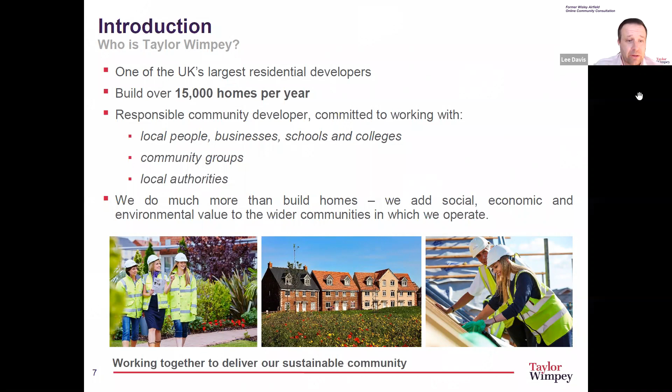Joining me on the former Wisley Airfield project are an experienced and dedicated Taylor Wimpey team, including Antonis, who you heard from earlier, our Community and Green Infrastructure Project Manager, Camille Soor, our Planning Manager, and James Newton, also a Planning Manager, who's not presenting today. I'm also pleased to advise that we've partnered with Vivid Housing Group to deliver 40% of the much needed affordable housing in the area. May I introduce you to John Waterfield from Vivid Homes.

Yes, morning. Thank you, Lee. Yes, we're really excited to be working with Taylor Wimpey on this scheme.

I'd just like to give you a little bit of background to Vivid. Vivid is a medium-sized housing association providing housing for people in housing need. Our vision is to provide more homes and bright futures by helping our customers improve their life chances and their well-being. We're a leading provider of affordable homes and housing related services and support to about 70,000 customers in the south of England. We have about 31,000 homes spanning Hampshire, Surrey, Berkshire, and expanding now into West Sussex. We're planning to build about 17,000 homes over the next 10 years, which is very ambitious, and over 1,200 of these homes over the next year alone. So that's a quick background to Vivid, and I'd like to hand you back now to Antonis.

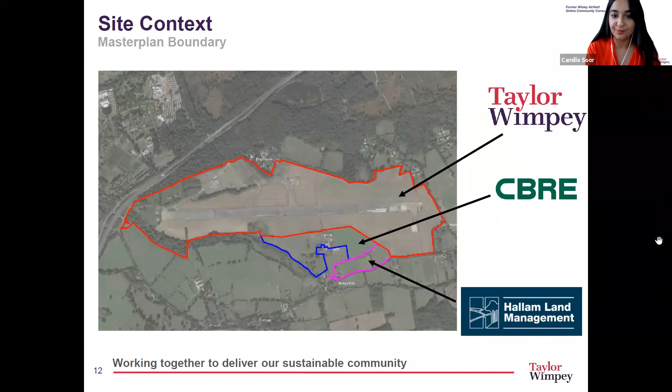This is our vision, working together to deliver our sustainable community. But what does it mean? It means we are working to communicate, engage, and consult with you all in an open and transparent manner. This includes working with our delivery partner Vivid, who you heard from earlier, Guildford Borough Council, Surrey County Council, you as residents, the wider community and stakeholders.

We are pushing to be as truly sustainable as we can from the perspective of climate change, biodiversity, transport, and health and well-being. We want to bring this all together to deliver a new community which is centred around placemaking. It's forward-thinking, has a strong legacy, and is exemplar. By doing so, we aim to provide benefits to and integrate with the existing community surrounding the site.

Setting the planning policy baseline for us is the adopted local plan, as well as the emerging Lovelace neighbourhood plan and supporting supplementary planning guidance, which includes the Strategic Development Framework SPD. As set out in our first public consultation, the adopted local plan sets the principle of development on this site.

Through policy A35, which seeks to deliver approximately 2,000 homes and approximately 100 extra care units on the site, along with a suite of supporting non-residential uses. As set out previously, this will also include a large amount of open green space, which our team will touch on later.

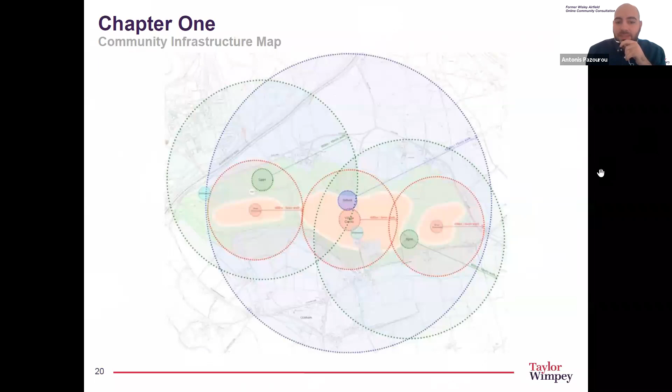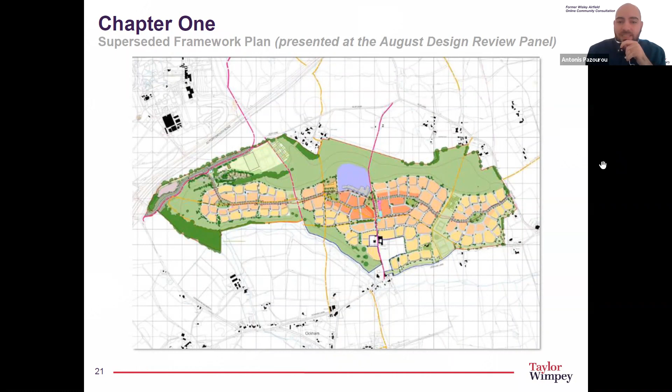In September, we received the meeting minutes from that design review panel, which have been uploaded onto our website in the documents library, so please feel free to review those at your leisure. A few key things we took from that and will be working on moving forward include the concept of a series of villages, defining a richer sense of place, and integrating with the community. Please do review those meeting minutes on our website.

Since July, we have put together a community liaison group consisting of 14 local stakeholder groups. I'm pleased to inform you that we have received further interest and will be allowing further groups to join, where we discuss aspects of the site in more detail. The group typically meets every 2 weeks, and please feel free to go to our website to see the presentations and meeting minutes from those meetings.

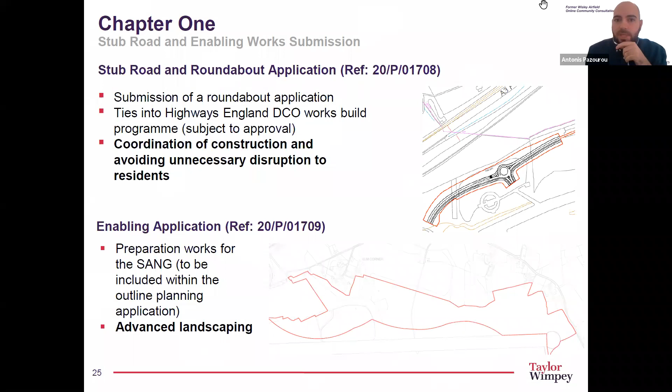Of course. As mentioned earlier, we have now submitted our stub road and enabling works applications. These have both been registered and validated by the local council and are currently being consulted on by all internal and external consultees. We are closely monitoring the applications and any comments received, and working with Guildford Borough Council to aim to have both applications decided in the first quarter of 2021.

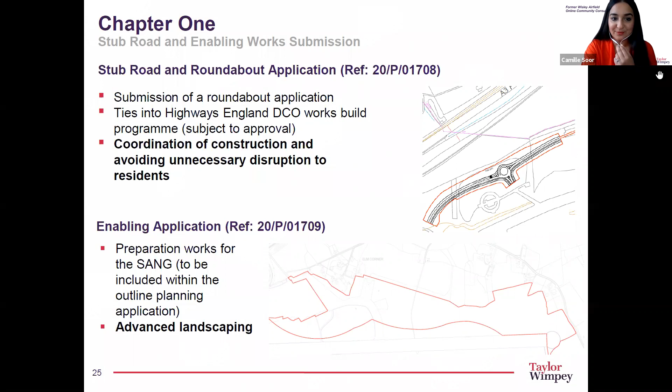Thank you, Camille. So we've had an introduction and an update as to what we've been working on. If I hand over to Graham Kime, our master plan architect, he will run through where we are with the latest master plan.

Good morning, my name is Graham Kime. I'm a director of Gardner Stewart Architects, and we're working with Taylor Wimpey as the master planners for this new settlement. At the last consultation event in July, we discussed strategic ideas relating to this neighbourhood, including how we might break it down into 3 different villages, and the types of facilities we would be providing, asking where you thought the best locations for those facilities would be. There was a high degree of agreement in the feedback, and this diagram shows the preferred locations together on one drawing, including some walk distances that feel comfortable in terms of our aims to encourage walking and cycling. Thank you for your thoughts on that.

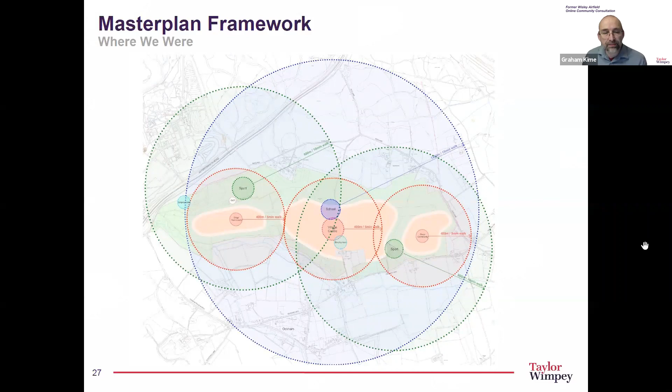This starts to give some shape to our new community. But of course that's not design. A master plan is more than a response to a series of constraints and functions - it also has to create a place where people want to live and that can enrich their lives. So we're focusing on placemaking, on creating communities and on building connections - physical connections, but also social and community connections and visual connections. Our concept proposes a series of green lanes and village greens connected by a sustainable transport corridor.

The new settlement will comprise 3 villages set in an extensive country park known as the SANG, separated by wide swathes of green space, about 80 to 100 metres across. The village greens create a sense of arrival to each village and a focus for community life. Each green is located where connections come together to form a natural focus, where one of the green lanes, the primary north-south pedestrian and cycle routes, meets the sustainable transport corridor that connects the 3 villages.

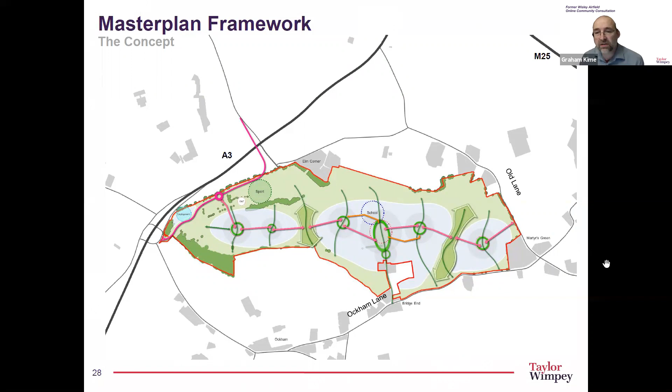At a more detailed level, the master plan is a series of localized design responses, ideas that relate to a particular part of the site or integrate a particular function. So we pose questions and we identify design responses.

How should we respond to the Stratford Brook and the wonderful woodland in that part of the site? Or how can we encourage people to walk or cycle to the shops? This drawing is a cartoon of all of those ideas combined so that they interrelate and work together to reinforce the overall concept.

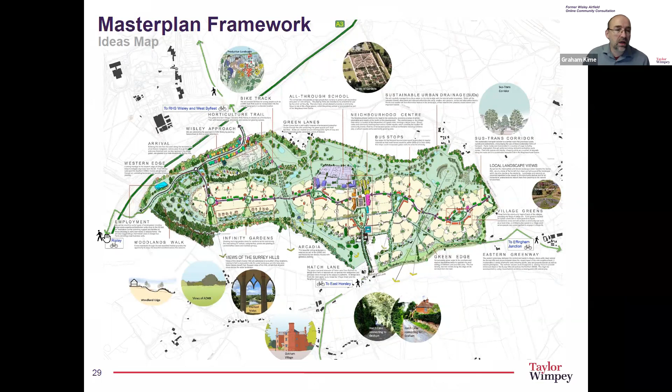So we'll now go on a journey of the site together. Let's assume we're arriving from the Ockham interchange by car, bus or cycle. This is the westernmost village closest to the A3. Number 1 is the proposed Wisley Lane diversion that, subject to final approval, is being built by Highways England as part of the A3 improvements. That road will come off the Ockham interchange roundabout, pass through our site, and go over the A3 to provide a new access to RHS Wisley.

As we come along Wisley Lane, we can glance across the open space through the woodland planting and the new rolling topography towards our development.

Number 2 is about arrival. We propose to access our new settlement from this new road. At this point, there is currently a row of mature trees, which was part of an historic hedgerow that crossed the site before the airfield was built.

Our idea is to follow the line of this old hedgerow to create an arrival sequence. Firstly, we have some ponds and the mature trees that signal the turning, and then a pair of sentinel buildings that form a gateway. Then as you reach the village green, the arrival space, you crown the hill and you're greeted with a view across the Surrey Hills.

This view provides a connection to the wider context. It's part of the experience of the site that we'd like to retain, so we will open up this view in a number of locations.

You may be wondering why we have some multicoloured trees. Well, this road is also an entrance to RHS Wisley, and there's an opportunity to celebrate that. In collaboration with RHS Wisley, perhaps we can create a sense of arrival through the planting of specimen trees like a linear arboretum.

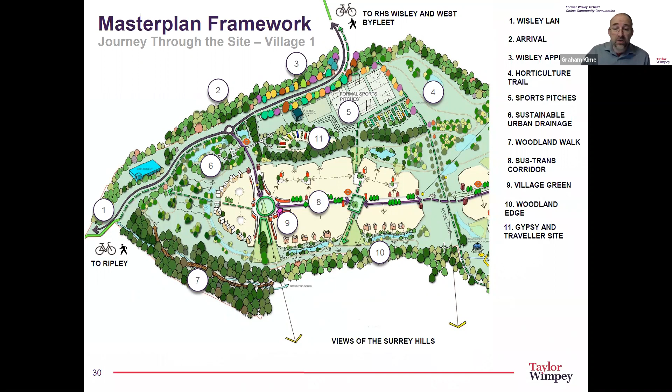Summarising some of those ideas: the woodland walk with the raised boardwalk, the framed views across the Surrey Hills as we arrive into Village 1, and the horticultural trail on the route to RHS Wisley.

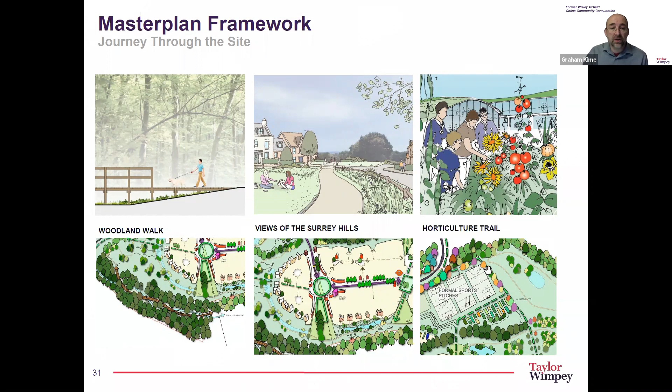Next we look at the central village, which is the largest of the 3 villages, separated from Village 1 by a strategic green corridor shown at number 1. This is about 100 metres wide, so it's a wide swathe of green space that creates a real separation.

This is another of those locations where you get these incredible views over the tops of the trees looking towards the Surrey Hills. Numbers 2 and 3 show the village greens and the green lanes that we described earlier.

Village 2 has 3 village greens, including the larger village park as part of the neighbourhood centre. The village park is located where 5 different public rights of way all converge, so it really is a natural focus point. Perhaps there's an opportunity there for some public art where these things come together.

Many of you who know the site will also recognise this row of poplar trees, which are an existing landscape feature and help to frame some lovely views down towards the Stratford Brook.

Number 4 is the neighbourhood centre, which is the heart of the whole community. We'll discuss this later. This contains a wide range of uses, including shops, cafes, employment and community buildings, arranged around a series of landscape spaces.

Promoting the idea of multi-generational places, we've located the senior living apartments in the neighbourhood centre as well, close to the primary school, where there's an opportunity to engage in village life.

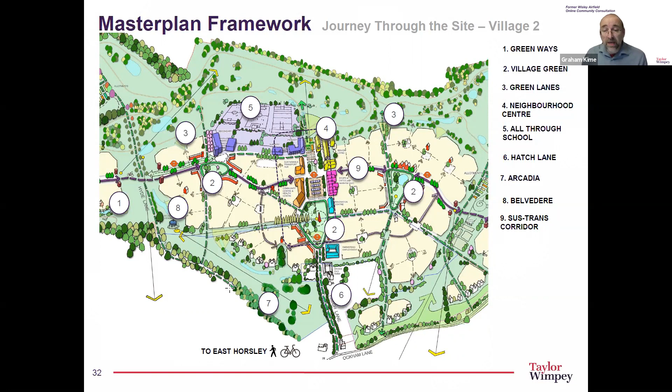So again, here are three of those ideas: the sustainable transport corridor, the neighbourhood centre, with this view of people enjoying some alfresco dining, looking down towards Bridge End Farm and the houses overlooking that village central park.

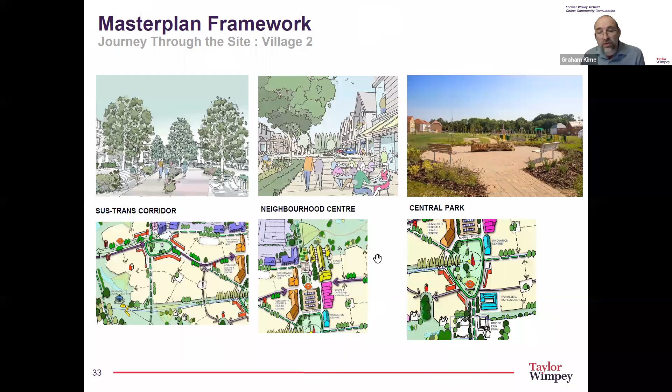Finally, village 3 in the east of the site. Again, a strategic green corridor separates villages 2 and 3, which is at least 80 metres wide, and this is once again aligned with those views across the Surrey Hills.

We're suggesting a viewing mound in the north of this area to take full advantage of those views, and also of the views looking west along the full length of the northern SANG. This idea of ground modelling then comes into the greenway, where there could be a raised play mound that integrates natural play features into the landscape.

Along the southern and eastern edges, we want to preserve the rural character of both Ockham Lane and Old Lane, so we're proposing a setback of about 20 metres of green space. The houses along this edge will be low density and low rise, with opportunities to break up the edge of the development with landscape.

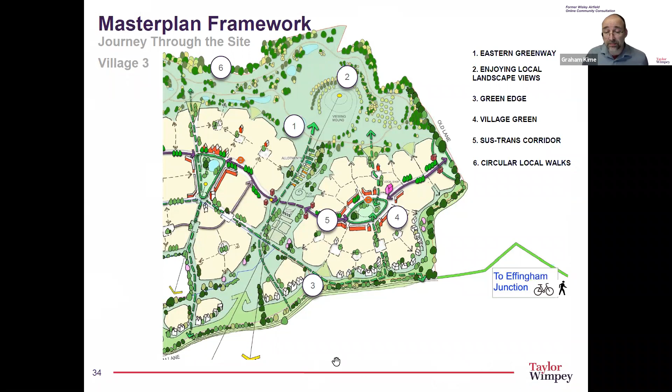So again, some images of these ideas, taking advantage of the views using the topography. This is the Fruit Mount at RHS Wisley, which sets up a view axis towards the glasshouse. The green edge with low density houses set back from Ockham Lane, and of course there's the variety of circular walks that we will be providing within the SANG.

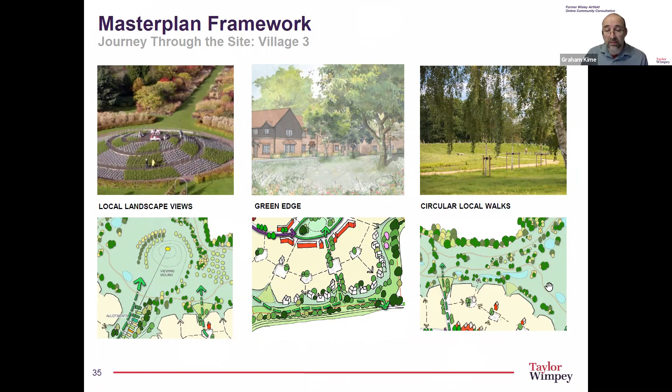Following the various rounds of engagement and consultation so far, the framework's developed and evolved to address different considerations and incorporate new ideas and opportunities. So this is the current framework that we're working on now.

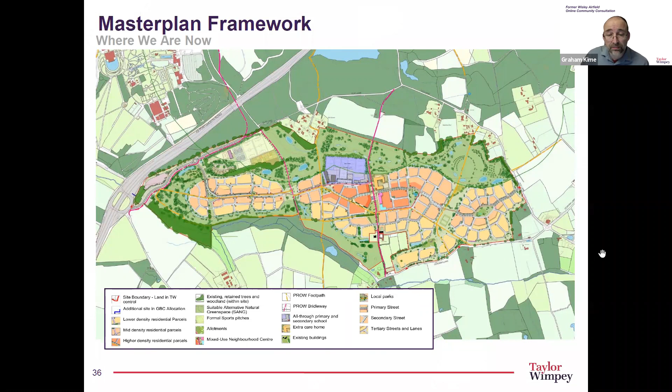You can also see the village areas that are focused around the village greens. As part of our design process, we've studied many of the surrounding villages to understand their forms, their architecture and their spaces. There are a lot of village greens in Surrey, and they come in all shapes and sizes.

As Camille said at the beginning, we're submitting an outline planning application, so we're not designing the buildings in detail at this stage. The homes we're showing here are illustrative. We will be designing the homes and streets later, and they will take their cues from the architectural forms, features, and materials of the local area. But this new settlement needs to create its own sense of identity, so we don't necessarily have to replicate those buildings, and we'd like to hear your views on the architectural approach we should adopt to make this place distinctive.

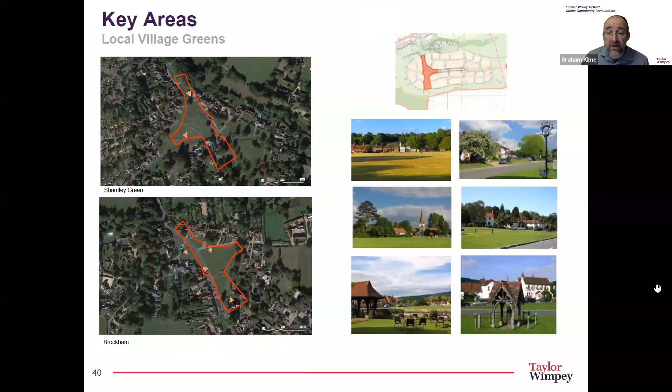So what about the size and scale of our spaces? Here are some comparison slides showing our green spaces in a red outline overlaid on some local village greens that you may know. This is an outline of our Village 1 green overlaid on village greens at Shamley Green and Brockham, and you can see the spaces are comparable. The size of our village park, which is larger, is comparable to Chiddingfold Green, and our Market Square is comparable in width to the linear spaces found in the centre of Cranleigh.

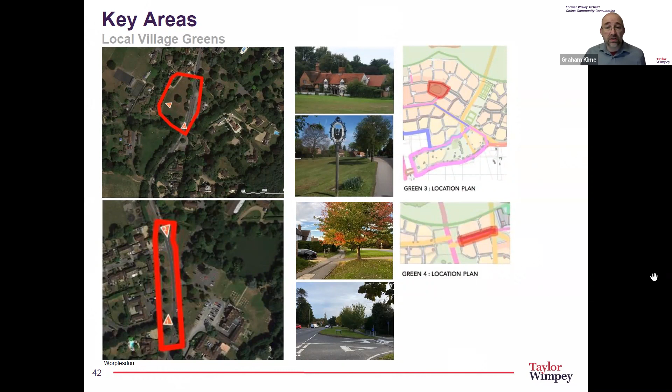Similarly, this green in Worplesdon is similar in size to our green in Village 3, and the linear space that extends from the green in Worplesdon, with its houses set back and wide green verges protecting the pedestrian and cycle route from the edge of the road, is very similar to the approach we're taking to segregate pedestrian and cycle routes on our approach to the schools.

So it brings us back to the question: what do you think we should be providing in our contemporary village greens? Is it the same as these examples, or different? We've put some ideas together, such as children's play, public art, and a local information board. It would be much appreciated if you could suggest your own ideas in the feedback forms.

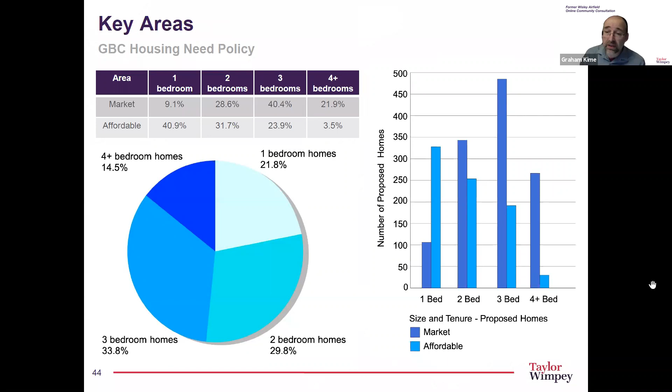So what sort of homes will we be providing here? Across the site, we're master planning for 2,000 homes overall, of which just under 1,800 will be on the Taylor Wimpey part of the site, plus 100 specialist senior living apartments. We'll be providing a range of housing that meets local need as set out in Guildford Borough Council's housing policy, which, as you can see from the pie chart, is mainly 2 and 3 bedroomed homes. 40% of the homes will be affordable tenures, and it's great to have John here from Vivid, who will be able to answer any questions you have on that.

We're required to make efficient use of the land, and the allocation and the SPD suggest we should build at an average of 45 dwellings per hectare. So the density of homes will not be the same as the surrounding settlements. This place will have its own character and generally higher densities.

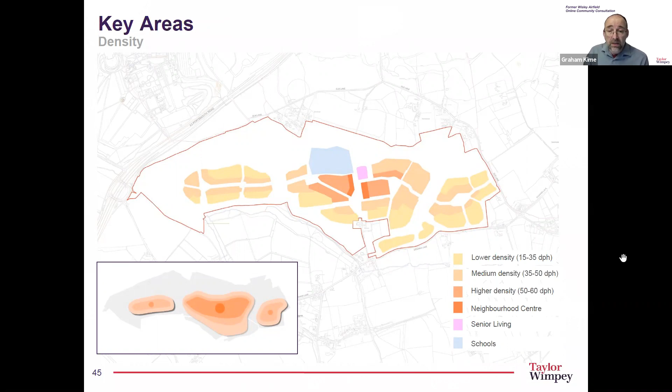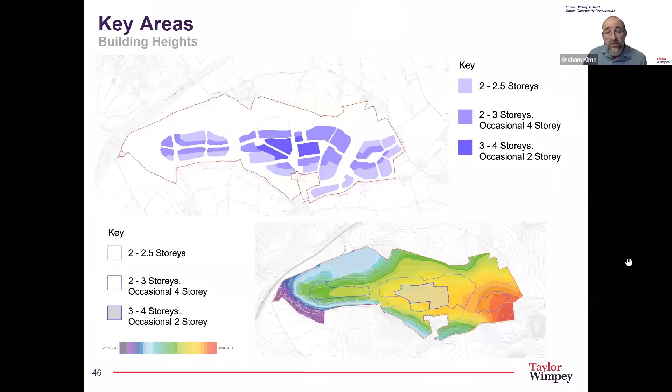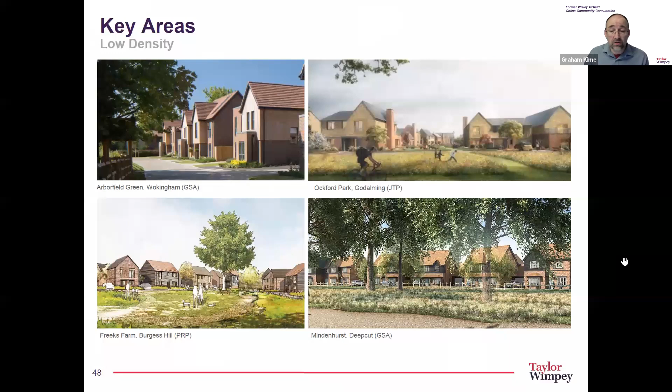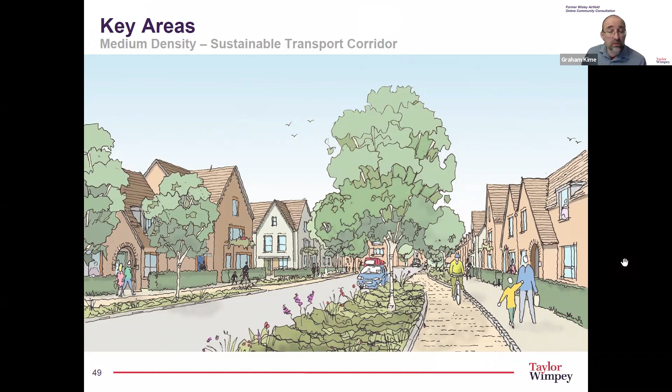Again, this architecture is illustrative, and these local building forms and materials could equally be applied in a more contemporary way, if that was the approach we took.

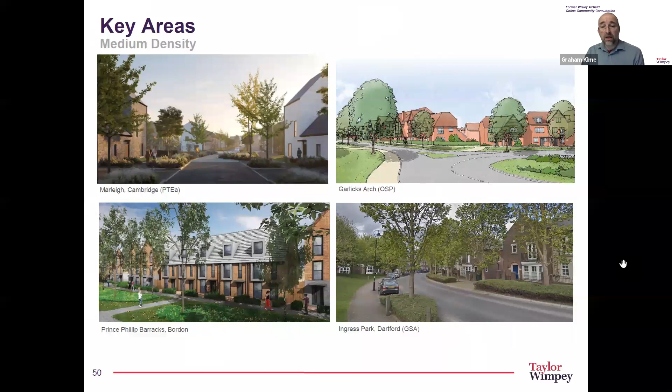Away from the central corridor, the medium density areas will be designed as narrow streets and lanes. They'll be tighter, more pedestrian friendly, with slower traffic speeds and a variety of architectural forms and locally relevant materials such as brick and tile hanging.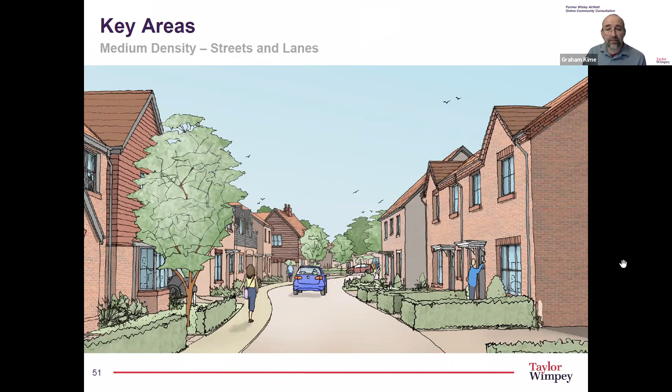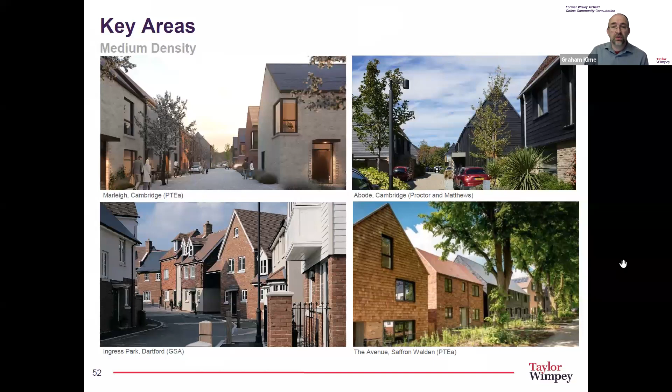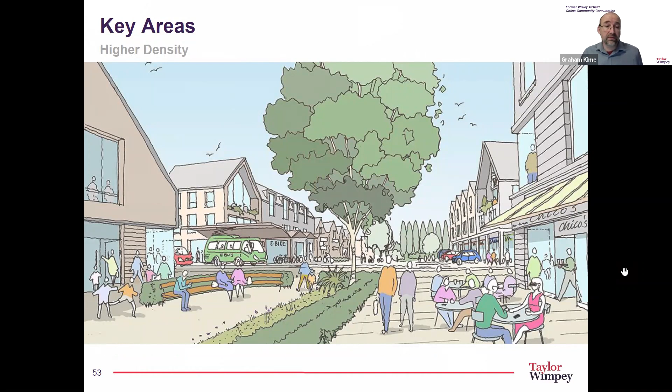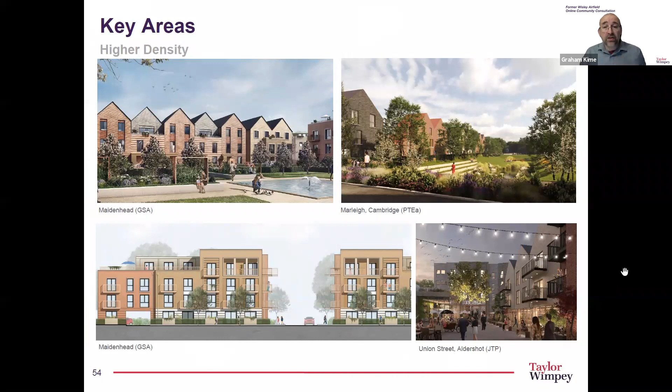I mentioned the sustainable transport corridor that runs through the site, ties together all these different areas and connects all the different facilities. Whilst its character will change as it passes through the different parts of the development, it remains a constant element which helps to provide orientation.

Its purpose is to connect to places and to encourage people to use more sustainable forms of transport by making it as easy as possible to get from one part of the site to another on foot or cycle, via an attractive and safe route.

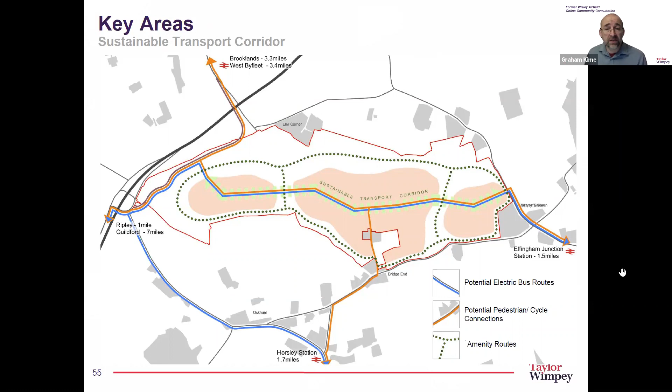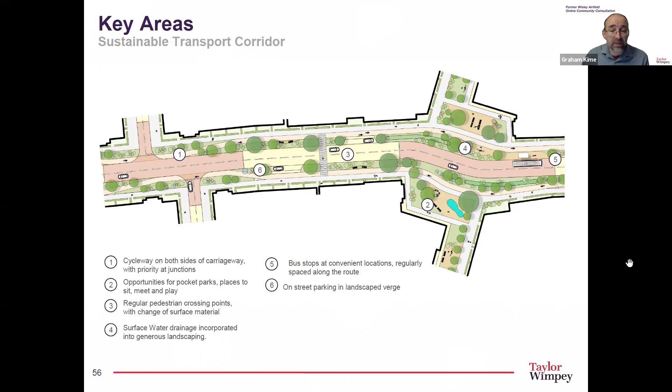And it's not just about movement, it's about turning a road corridor into something more communal and celebrating it. It's about creating a green outlook for more people, introducing little pocket parks and village greens as a point of orientation, somewhere to stop and chat, for the kids to play on their way home from school. And it's a sustainable drainage corridor.

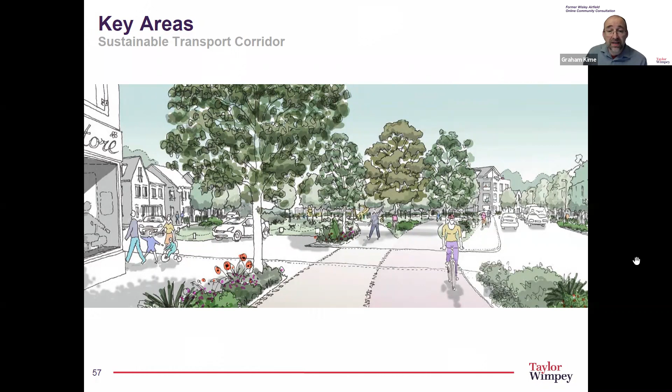So it's something more than a road, it's a piece of green infrastructure, and it's a positive piece of placemaking. All of the green spaces are hugely important in the master plan, both in the way that they create an attractive and pleasant environment, but also the way that they contribute towards a green and healthy neighbourhood, providing opportunities for people to be active and to socialise, which I think we've all recognised has become increasingly important.

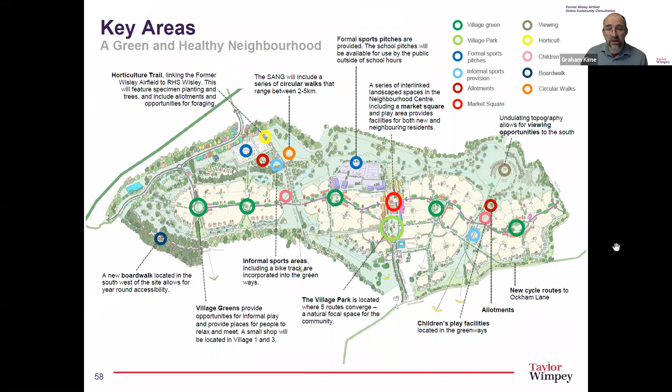The neighbourhood centre then provides a focus for the whole community. It will include shops, including a food store, and cafes. It will have community buildings such as a village hall and a health facility, and also employment uses. It will engage with the schools and with homes. So it's a genuine mix of uses.

And the neighbourhood centre is arranged along the line of Hatch Lane. This is retained as the rural lane in the south, then opens up to reveal a central park where the five pedestrian routes converge. Within the park there'll be a variety of uses: a children's play space, terrace seating for an informal lunch break, and the opportunity for public events that might be organised through the community trust.

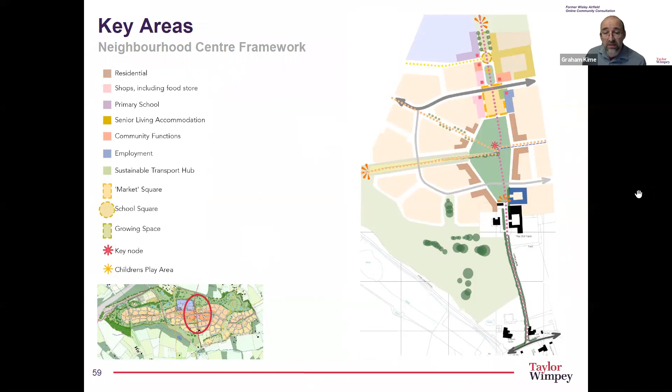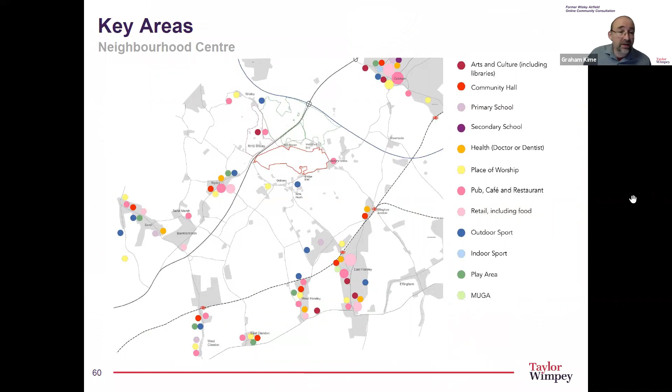We've carried out surveys of facilities in some of the surrounding areas in order to understand the types of services that we might need to provide in our neighbourhood centre. This shows one of the ways that we might organise the buildings and spaces. We're in discussion with a number of potential users and operators, so things may change as we start to pull those different ideas together. But essentially there will be a number of different buildings arranged around a progression of public spaces, and these spaces will offer a variety of characters and places that relate to the buildings around them.

For example, the shops face onto the market square, with the opportunity perhaps for a monthly farmers market. There's a small piazza by the cafe for outdoor eating, or a morning coffee say, and there's a public landscape garden by the community centre. Further north is the school square, where parents can gather to chat at home time.

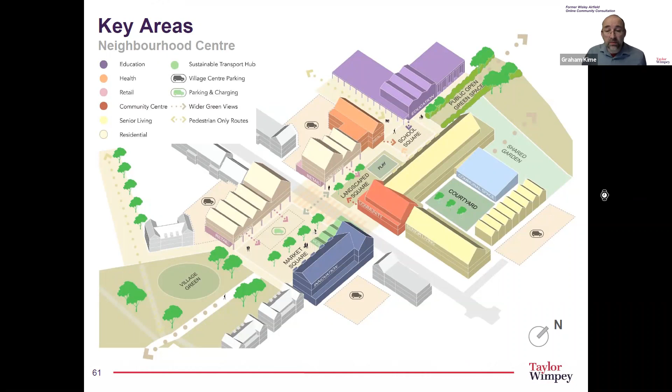In terms of the building uses, we're providing a food store with maybe five to eight smaller shops or cafe units, and all of these would have apartments above. We've mentioned the village hall, the community hall that's run by the community trust, and we're talking to healthcare providers about the health care facility.

There'll also be significant employment uses, and we're looking at how office space requirements may have changed in the post-COVID world. So potentially approaches that provide support to people who work from home or close to home by providing flexible office space and co-working space, like desk hire, meeting rooms, business advice, photocopying services, that type of thing. I think it's generally recognised that there will be more home working in the future, and this type of facility is a very appropriate and exciting idea that will add vitality to the neighbourhood centre and be a real community resource.

Another feature of the neighbourhood centre will be the sustainable transport hub, where you can lease your e-bike or e-scooter. There will be rapid charging points available for electric cars, and potentially an overhead charging point for an electric bus.

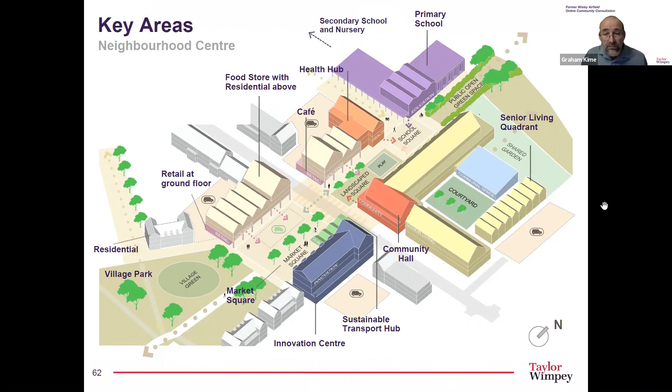We've put together a couple of images of recent neighbourhood centres showing different types of character, and we'd appreciate your views in the feedback forms.

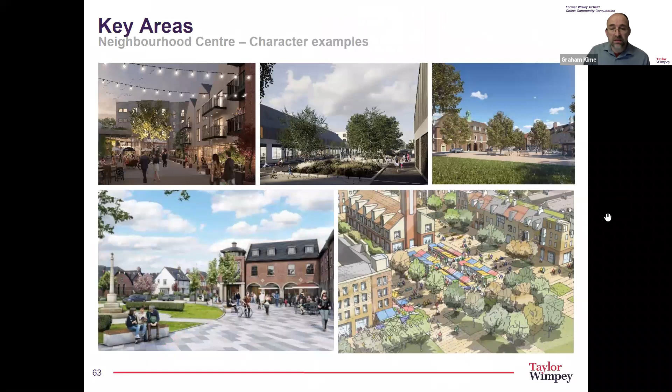So I'll finish my part of the presentation with our view of the neighbourhood centre: a cafe with outdoor seating, the community centre on the left, ahead the sustainable transport hub with its e-bikes and charging facilities, and then a row of shops with apartments above.

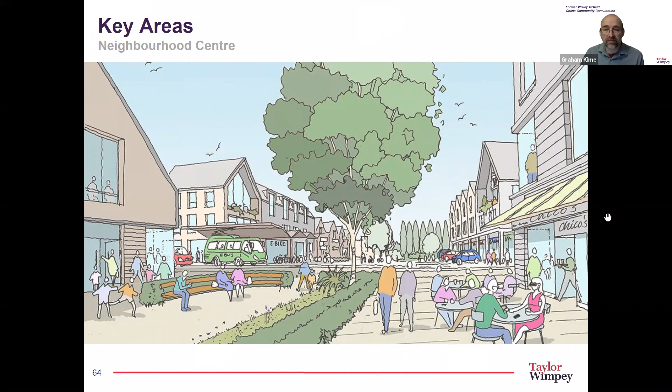Good morning everyone, and apologies if you can see a bit of distortion on the picture due to a graphics card problem with my laptop. My name is Colin Mackay, and for those who didn't attend the previous consultation, I'm the Technical Director leading the work WSP are doing on the transport aspects of the Wisley Airfield proposed development.

However, there were also a number of encouraging points we took away. For example, the majority of respondents agreed with our sustainable transport priority, and a quarter answered that they might agree with that priority but indicated more clarity would be required. There was also good support for e-bikes and for bus services.

So we have listened, and we want to show you how we've progressed since then.

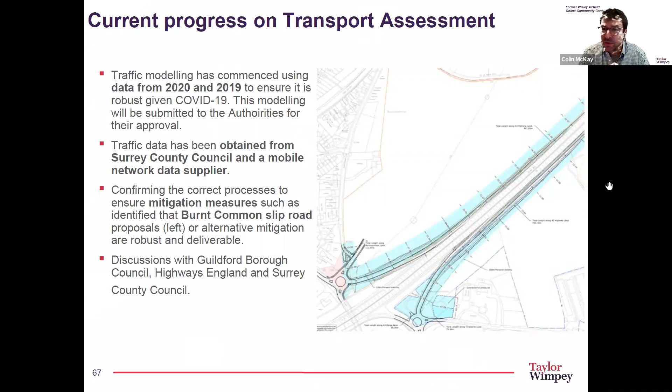So looking at our next steps on transport, engagement on the impacts and the schemes will take place during the rest of this year.

Again, we're conscious of the concerns about traffic raised during the previous consultation in July, and we expect to have feedback on this during the early part of next year once the modelling is complete. We'll also be carrying out ongoing engagement with stakeholders right up to submission of the application next year.

In the meantime, we want to set out how we're seeking to reduce traffic levels through the adoption and promotion of sustainable transport measures.

Sustainability is a mainstay of national and local policy. The adopted Guildford Borough Local Plan, Policy A35, which we set out here, shows what we are expected to address as part of the proposed development. It talks about access points, mitigation measures, and bus and cycle networks required for connectivity.

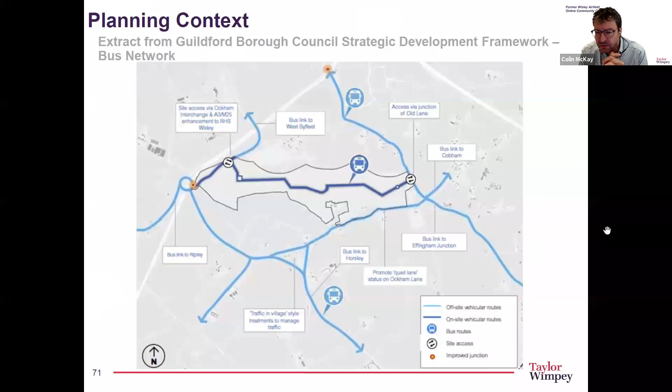These ideas have been further developed by Guildford Borough Council in the council's supplementary planning document, firstly in terms of the vehicular connections to the external destinations shown here. As you can see, this also includes some information on their expectations for bus links, and also what it terms active travel links on foot and bicycle.

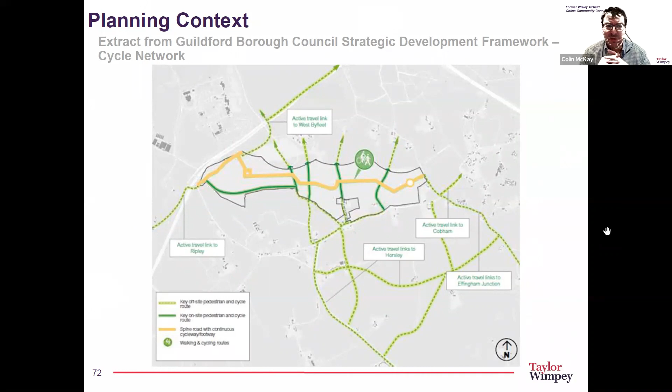These are all options we are actively exploring within the constraints we already know about from our detailed work to date.

The Guildford Borough Council also set out 6 groups of sustainability principles to assist in delivering each of the strategic development sites in the local plan, not just Wisley Airfield. We are following these principles closely in design of the master plan and in our transport strategy generally. As already stated, Taylor Wimpey are taking this development to be an exemplar for sustainability, and clearly transport is a major aspect of that agenda.

Most importantly, we want to influence travel decisions at the front door before the journey takes place. We're all familiar with the business as usual mindset, shown here. That mindset is driven by the lack of opportunities to do things differently.

Behaviour change expert Martin will touch on this later, but if the opportunities are made available, then people are more likely to change their travel habits, given the right encouragement.

By making these opportunities available, we aim to change that mindset to one that sees and makes use of the opportunities. Through thoughtful, intelligent design of the proposed development, people living there will see that the opportunities are all around them, and through publicity and promotion, the benefits will be pointed out to them.

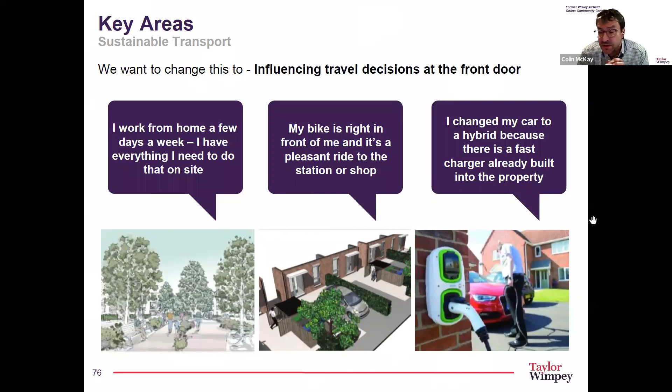Some decisions will also reflect changes in lifestyle some people may experience post-COVID, where they can work from home more frequently. We will be ensuring that adequate broadband connections are provided across the site.

So let's look at buses in a little bit more detail. Looking at the layout of the site, as you can see in the bottom left corner, the site lends itself to bus services very well, meaning a direct route through the site puts most houses within 200 metres of a bus stop and all of them within 400 metres, the recommended walking distance.

The bus stops themselves will provide shelter and could also integrate green roofs or solar panels to maximise their sustainable contribution. Electric buses are becoming more accepted into operators' fleets and they offer cheaper running costs.

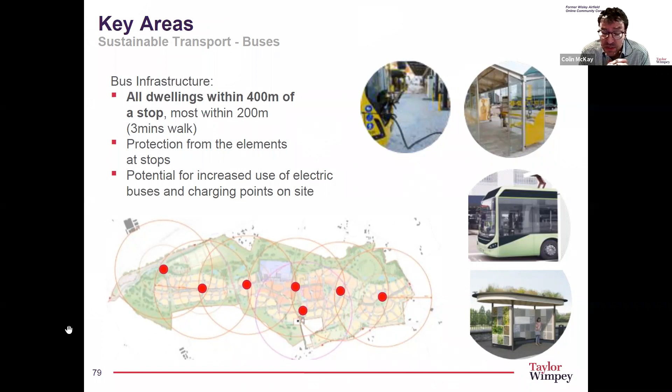Some are being used in Guildford already, as you will know. We will future-proof the site with charging infrastructure, as shown on Graham's sketch earlier, to make electric buses a practical option.

We also want to build on and bolster existing services. Some existing services would be enhanced to improve the frequency within existing communities, improving the offer beyond the site as well as serving the site itself.

You can see this from the sketches here of the intended bus strategy, showing that some infrequent existing services, shown in dotted orange lines, would be enhanced to a more frequent service, as shown on the right.

The priority is to serve the local railway stations, recognising the high proportion of rail travellers from this part of Surrey and the limited capacity of the car parks. So we will provide a high frequency service to match the train departures and arrivals as closely as practically possible.

Woking may also be served with its higher frequency service to London and Hampshire and its retail and employment opportunities. Although we do recognise commuting train services have tended to be much busier and more crowded than the services via Effingham.

Responding to feedback from Public Consultation 1, our service to Cobham will be provided if we possibly can, using one of the fleet of buses, probably not as frequent a service as the others, but it will allow, for example, shopping or personal business trips to this popular destination.

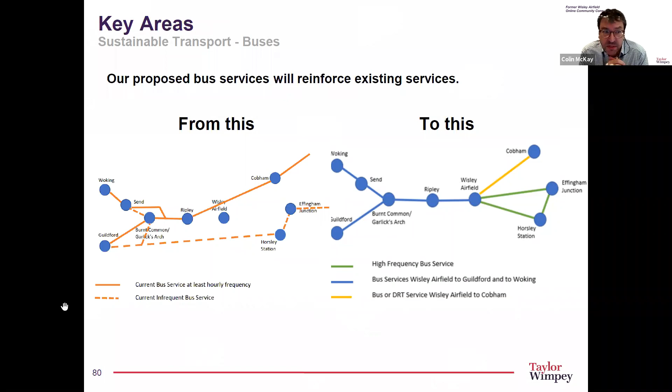As we show here, the number of buses in the fleet will be increased to meet demand as the proposed development progresses. It is very important to have a bus service in the early years, although it will probably comprise smaller vehicles and a more limited number of destinations will be served. However, a 7-day service will still be offered even in the early years.

In the later years, a fleet comprising a mix of vehicle sizes will go to all the identified destinations, and a longer daily service on the key routes will be provided to serve leisure trips and workers arriving late from London, for example. The bus services will be funded through the fares passengers pay, and in the early years, pump priming support will be available from Taylor Wimpey.

So our predicted modal share for the bus service will be projected and validated using a range of other experience throughout the UK on similar developments. However, this will be calibrated to a more local experience.

The Guildford urban area is an important reference, having modal shares of up to 14% in some locations, and typically up to 8% by bus. On this basis, we believe that the bus services we will be proposing can be supported without substantial ongoing subsidy.

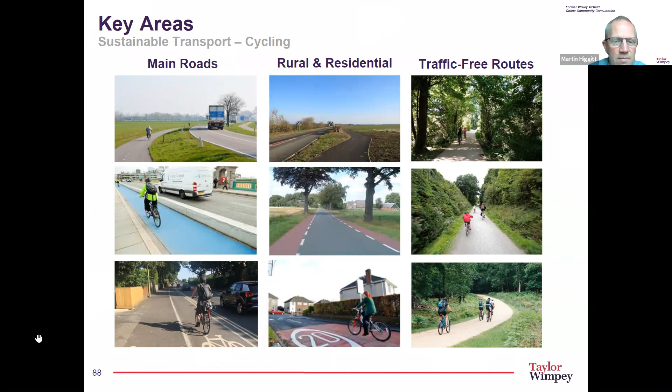Clear signing of cycle routes is important, and lighting, particularly of off-road routes, needs careful consideration. There's an issue of whether to light or not, but where decisions are taken to provide lighting, there are solutions that minimise upward light pollution.

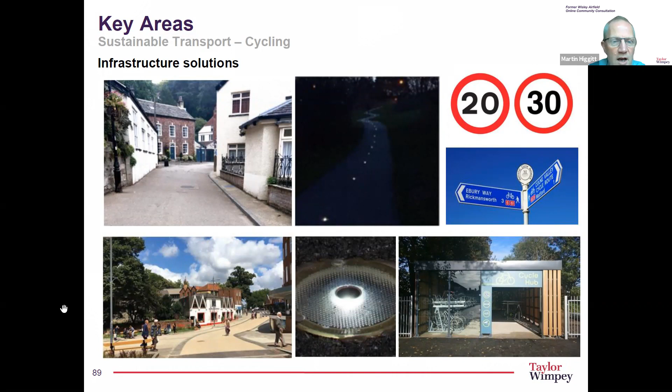Finally, secure, convenient cycle parking at final destinations is crucial. And there are plenty of good examples of high-quality cycle parking at railway stations, for example.

The policy challenge is to provide cycle links suitable for the average cyclist to 4 local destinations: East Horsley, Effingham Junction, Ripley and Byfleet. And we're currently developing our proposals for these links.

All of these destinations are within easy cycling distance, and the bike journeys are easily completed in 10 to 20 minutes and don't take a lot more time than driving. In some cases, such as Byfleet, cycling will be a lot quicker.

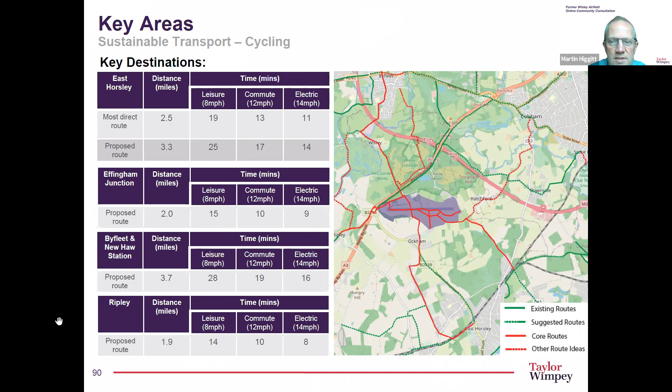So we're considering how the connections we deliver can link into existing routes and future aspirational routes. We hope this shows how our proposals will link strongly with existing and planned infrastructure to substantially increase the network of safe cycle routes in the wider area, making it possible to reach a range of destinations, not just for residents of our new community, but enabling many from surrounding communities to confidently and safely make cycle journeys.

And we'd welcome, again, specific feedback on whether there are any other cycle routes to key destinations that we should be thinking of.

Finally, from me for today, just to say a few words about promotional measures. We would look to undertake a lot of promotional activity through the travel plan to maximise the uptake of sustainable transport services and facilities that we provide. There would be travel plans for the different elements of the development, including the residential, employers and schools.

Possible promotional measures that we're currently working on include the following. Developing a website and travel app to provide up-to-date information to residents and site users on their travel options and providing easy access to some of the services we'll offer. Welcome packs provided to residents showing the facilities available on site and in neighbouring settlements and the travel options available to them.

Sales staff would be trained to advocate the sustainable transport options when people are contemplating moving here. It's really important that we start to influence the way people think about their travel options before they move in.

There would be a programme of ongoing support for sustainable travel, including social walks, social bike rides, bike tryouts, cycle training, adopt a bike, and maintenance classes, as well as car club demos.

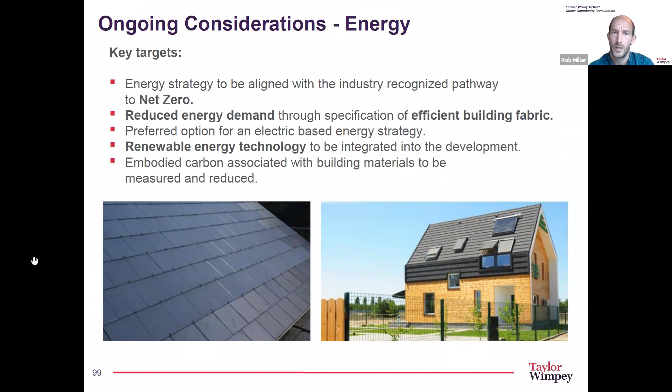So thanks very much, this is all from me on the sustainability strategy at this stage, and I'll now hand over to Sam to discuss the landscape approach for the scheme. Okay, thanks, Rob.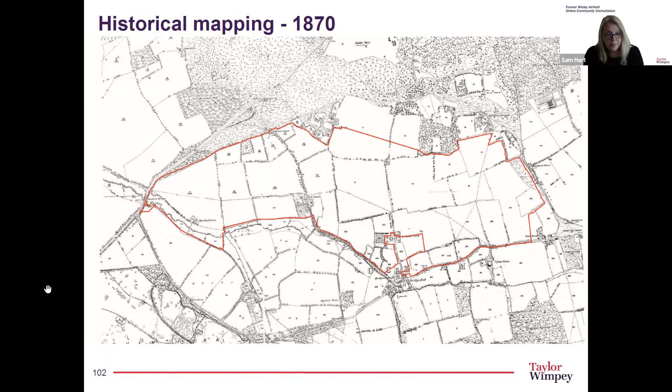As part of the developing vision, we've come up with a series of objectives that are driving the design choices, outlined by Graham earlier.

As shown on the previous map, there are a number of opportunities to restore landscape features such as woodland and hedgerows. Existing features such as trees, hedgerows and the woodland will be protected as part of the design and enhanced to improve their quality and longevity, and be reconnected to the wider landscape.

The reinforcement of the boundaries and connectivity of the landscape within the site will reinstate the smaller scale patterns evident in the wider countryside and provide a more intimate setting for development.

The proposals will provide a significant increase in the quality and quantum of key features such as hedgerows, trees and grasslands, and will extend from the wider setting into the villages.

Green corridors will divide and provide setting for the distinctive villages and include opportunities for formal and informal recreation and social interaction. We will look at the potential types and opportunities on the following slides.

In order to successfully set the development within the landscape, scale, density and height will be carefully considered and tested throughout the design. This will ensure the proposals can be successfully assimilated into the surrounding and existing proposed landscape framework. This is particularly relevant along the southern boundary and the higher parts of the site to the east.

The division of the development into 3 villages by the strategic green corridors will break up the roofscape and massing and views, including limited elevated views from the A3.

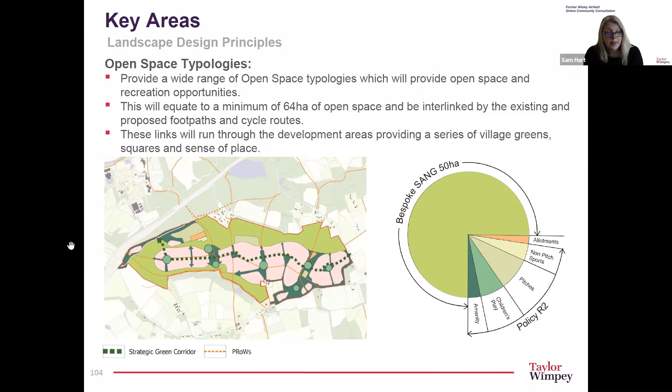The existing landscape features provide opportunities for two differing types of SANG. To the north, the existing arable fields and hardstanding will be transformed into a new wildlife haven with lots of features to draw people in. That will consist of mixed native woodland, copses, grasslands and wildflower meadows interspersed with ponds and linear swales to add interest and further opportunities for wildlife.

New landforms will be introduced to visually break up the openness between the footpath and cycle links and create opportunities for views and vistas towards points of interest and opportunities for natural play. The routes and views will be supplemented with art and sculptures, as well as seating areas and picnic benches. The northern SANG will also include a trim trail and park run routes linking with all the villages.

The southern SANG runs along the Stratford Brook and consists of a wet woodland and steep southern slopes, which provide an alternative range of habitats and visual experiences. These experiences will focus on the existing mature Stratford Brook corridor, and we've included, as Graham described, a boardwalk through the marshy grassland and bluebell areas, and this has been mentioned in previous consultations.

The steeper slopes will be managed for species-rich grasslands and will be interspersed with drainage features to create interesting local points and habitat opportunities. The southern boundary around Bridge End Farm provides opportunities for key views of the North Downs. These will be incorporated into the vistas and routes.

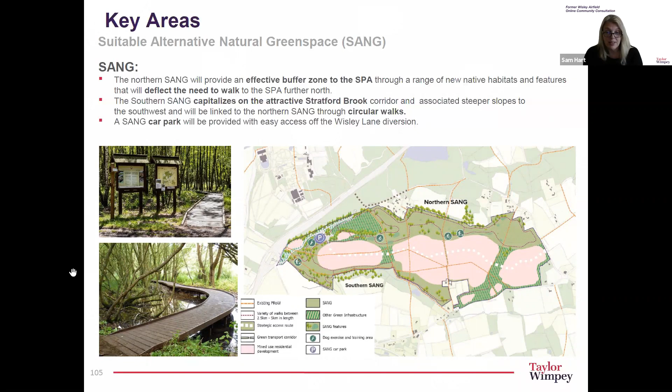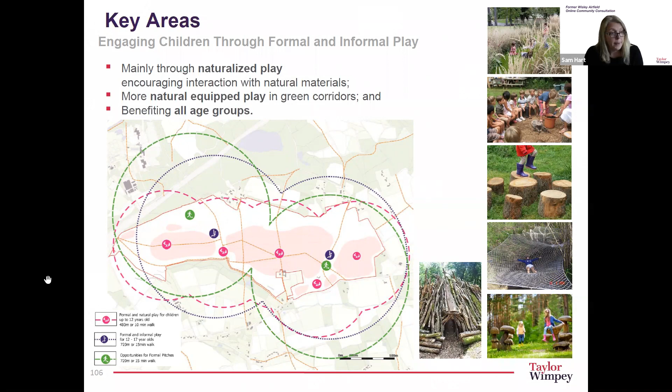Play forms an integral part of children's development and an important element to the building of community. The proposals will afford a wide range of experiences and opportunities in a range of environments for young and older children. These will be set within the recommended walking distances along safe routes and will all have clear natural surveillance.

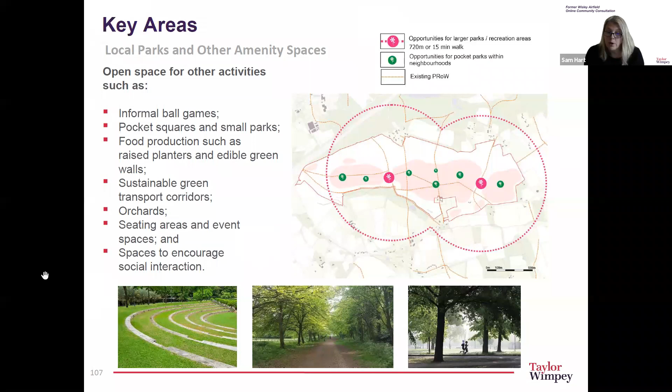The development will provide informal and formal spaces, which will provide a wide range of opportunities for recreation, socialising, interacting with nature, as well as creating attractive settings and identities to each of the villages. We've summarised a selection of potential activities here, but again, we're open to any further suggestions of things you'd like to see included.

It's important to harness the mental and physical welfare benefits that growing food can bring and provide the opportunity for food production on people's doorsteps. We've just set out a couple of bullets here of things we're considering at the moment, and would really love to hear your thoughts on these. These will range in size from the more traditional allotments to other localised community and educational opportunities. The SANG will provide opportunities to incorporate informal food gathering, such as foraging routes.

The ongoing consultations have identified local concerns regarding runoff from the airfield. The drainage strategy is being developed to alleviate this situation and capture all current and future runoff within the site. Flood risk will be managed in a positive way, celebrating water and its value as a precious resource not to be wasted. It will be a highly integrated and holistic system, linking the urban and green infrastructure.

It will provide and enhance biodiversity opportunities, create attractive features such as naturalised and formal ponds, and be interconnected through ditches and swales. It will provide opportunities for rain gardens, biofiltration beds, art, play, and educational opportunities. The water and SUDS will also be used within the site to harvest and irrigate public spaces.

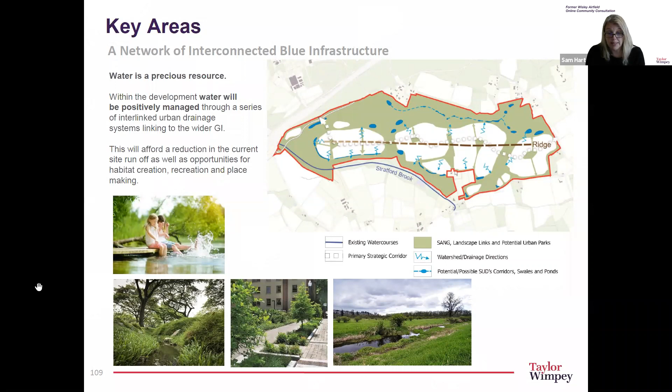My job is to ensure that ecology and wildlife is taken into account in all aspects of the project and is protected as part of the scheme. This includes making sure we have up-to-date survey information regarding the features present on the site, carrying out impact assessments and designing mitigation, feeding back ecological requirements to the master planning and design teams, and providing advice and supervision for ongoing site investigations, as well as during implementation.

We know that local residents have expressed concern about the existing wildlife on site and how it will be protected. I want to reassure you that conserving the existing features of ecological importance on site is our priority too, and we're working very closely with the design team on this.

Some of you may have heard my colleague Jodie talk about existing ecological habitats and species at the site during the last public consultation. This time I'd like to share our thoughts on how we can integrate biodiversity into the whole development, and in doing so mitigate ecological impacts, create new habitats and features of ecological value, and ensure overall gains for biodiversity. We had some really good feedback on this from the previous public consultation, so thank you to those who contributed.

We're committed to delivering biodiversity net gain, so I'd first like to talk a bit about this concept and then look at how we can achieve this at the former Wisley Airfield.

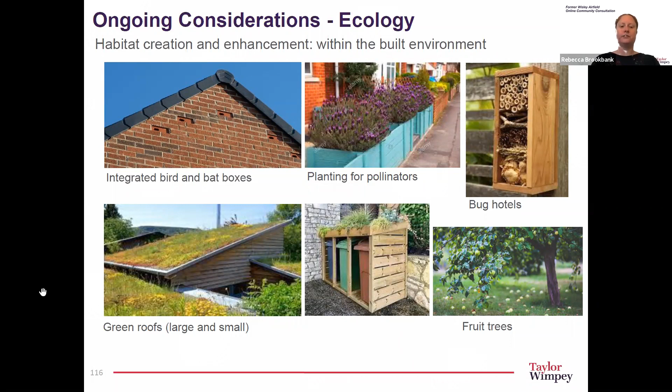Many thanks, Rebecca. I'm Mark Patchett, a specialist in stewardship, legacy, and associated charitable trusts within new housing developments. All of the facilities described by my colleagues, including the SANG, children's play areas, community buildings, the sports and leisure facilities, and the public open space, will need to be maintained and managed in perpetuity after Taylor Wimpey have finished and left.

To do so, Taylor Wimpey intend to create a new stewardship and legacy organisation to both manage all the public facilities and to use those facilities to create a strong sense of community.

At Wisley Airfield, all of the community assets will be transferred to this new stewardship organisation. But it will not just be about the ownership and maintenance of all of the public facilities. The organisation will also host events, activities, and encourage new community groups, all designed to create a strong sense of community.

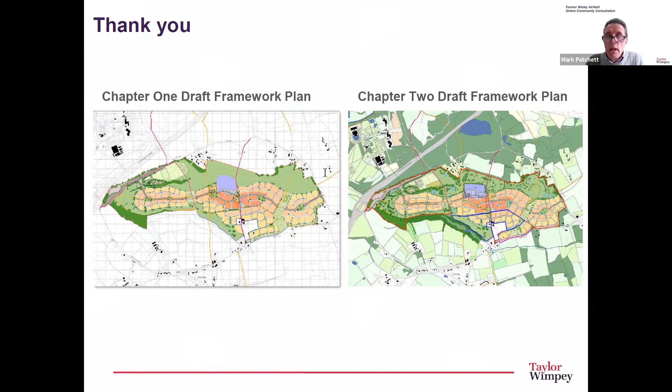Yeah, sure. Thanks, Antonis. Well, there's a whole number of things here. It links to another question someone else put up - I think Catherine wrote about potentially the church being overrun. First of all, if the church was overrun, I think Reverend Hugh Greer and the diocese would be really thrilled. But in practice, the real issue is how we enable stuff to take place on site. So an important question, and the approach will be that Taylor Wimpey, through the trust, will work very closely with the local parish church and the diocese to enable that to happen.

We've got some good examples we can draw on. I've recently run a project myself - one you might look up at Stonegrove, where the pioneer minister was co-located alongside the trust in the community centre, and worked very closely with the trust and the people throughout. That's particularly around placemaking and helping people with both their mental welfare and spiritual welfare.

But the other key point to note is the church also has some statutory functions required - some of you might know the term, it's hatch, match and dispatch, or baptisms, weddings and funerals. Those can either take place in the parish church, or it may be that we look at, in partnership with the diocese, licensing some facility within the development. But what I want to say is that we'd be very keen to work with any pioneer minister and enable that to work in practical ways around the placemaking stuff, as well as practical use of the buildings.